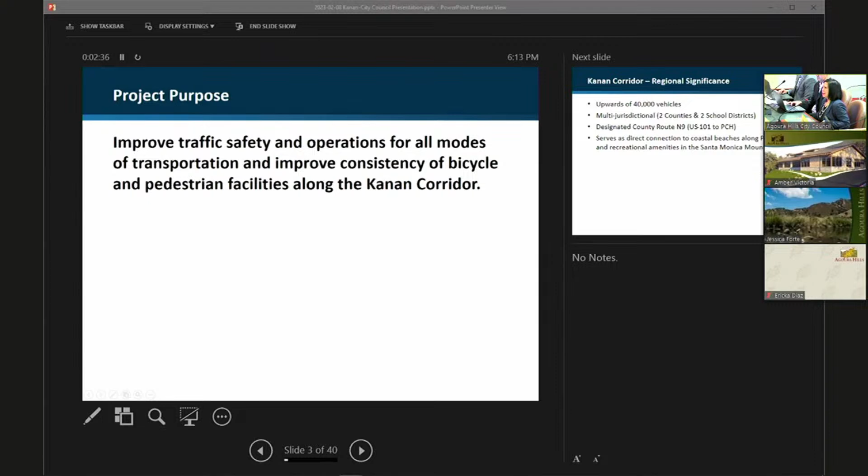Kanan Corridor is one of the most highly traveled roadways in all of Conejo Valley. Daily, the corridor carries upwards to 40,000 vehicles. The Kanan Corridor presents daily safety and operational challenges for motorists from not only the city of Agoura Hills, but both Los Angeles and Ventura counties, and those attending schools in the Las Virgenes and Oak Park school districts. Kanan Road serves as one of the few direct connections to popular destinations in the Santa Monica Mountains, as well as coastal beaches along the PCH.

And, of course, the Kanan Corridor has a direct impact to conveyance of traffic to and from the US 101 freeway. Over the years, the city has administered and completed surveys, studies, and improvement projects along the corridor, all seeking to improve traffic flow. Oops, we lost our... The task to find ways to reduce congestion along the corridor is challenging and very complicated. The city has reiterated their commitment to improving Kanan Road by undertaking the Kanan Corridor Safety, Operations, and Capacity Enhancement Project, and it's been included as part of Metro's Long-Range Transportation Plan and receives Measure R and M funds.

In 2017, the city awarded a professional service agreement to Michael Baker International to complete a project study report for the project. And more recently, in November of 2021, the City Council provided approval for staff and MBI to proceed with Caltrans to begin the project initiation document phase for final approval of the project study report, which is the first phase to a multi-phase project. I would now like to turn the presentation over to Michael Baker International to provide a project status update with Caltrans and presentation of the concept build alternatives for the Kanan Corridor. Joining us tonight, we have Mr. Eric Spangler and Mr. Jerusalem Verano.

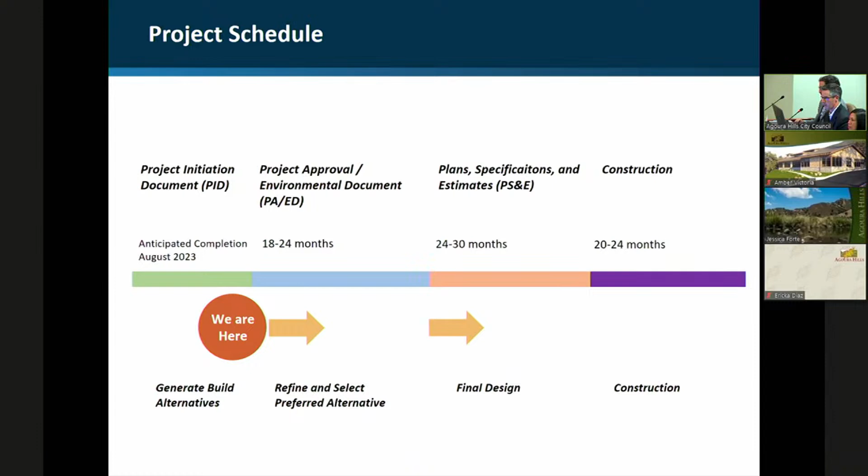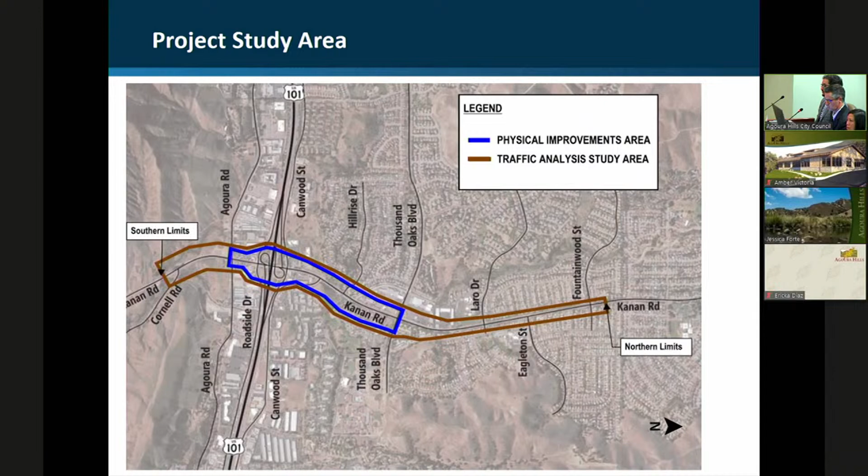Okay, so this is just the interchange Caltrans portion of the project, but I just wanted to give a highlight of the existing traffic challenges and constraints along this portion of the project. So within the Caltrans jurisdiction or adjacent to it, you have 4 closely spaced intersections with high traffic volumes going through the Kanan corridor. Agoura Road, the southbound ramps / roadside, the northbound ramps / Canwood frontage road, and then also the Canwood East Kanan intersection is also a signalized intersection.

Between Agoura and roadside, we have multiple driveways. At both the roadside and Canwood frontage roads, we have a signal operation that assigns an exclusive phase for the frontage roads, so we lose green time as we assign an exclusive phase for those frontage roads, which have much smaller volumes than the other approaches to those intersections. So there's clear inefficiencies in that regard at those 2 signalized intersections.

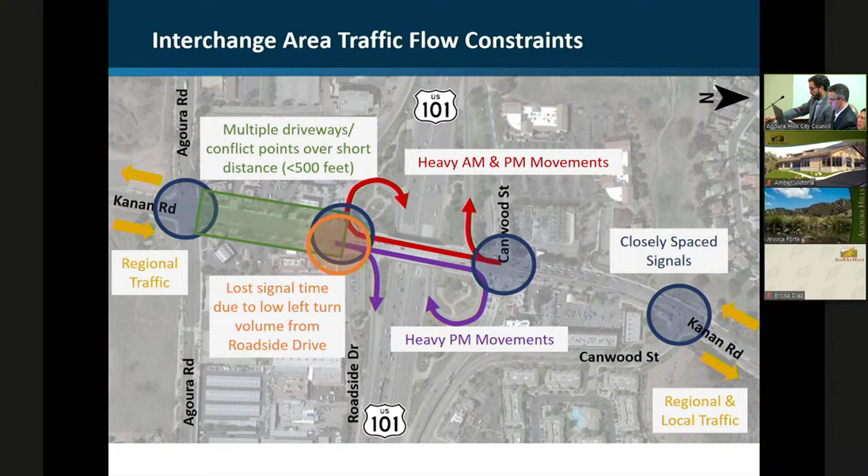And in red, you can see the northbound 101 ramps have heavy AM and PM demand and traffic volumes, and then the ramps coming from the south on Kanan to the freeway using the loop northbound on-ramp and the direct slip southbound on-ramp are heavy in the PM hours. So let's go to the next slide, and I'm going to hand it over to Jerusalem Verano, who's the project engineer, to walk you through the concept alternatives that we've developed so far.

Good evening. As Eric mentioned, my name is Jerusalem Verano, and I am the project engineer. And so we'll jump right into the concepts that we've been developing with the city. We'll start with the no-build alternative, which is alternative 1. The no-build alternative is essentially where we leave the existing facility as is and make no improvements.

So I'd like to just go over some of the existing features of the roadway along Kanan, and just to orient everyone, to the left in blue, we have the planned city improvements at Agoura and Kanan Road. Down the middle of the page is Kanan Road, and down the center is the southbound 101 freeway with all of the on and off ramps. To the right of the page will always be north throughout this presentation. So whenever I say top, I mean west, and whenever I say bottom, I mean east along Kanan. So there's a few inefficiencies along the roadway that we'll get into on the next slide.

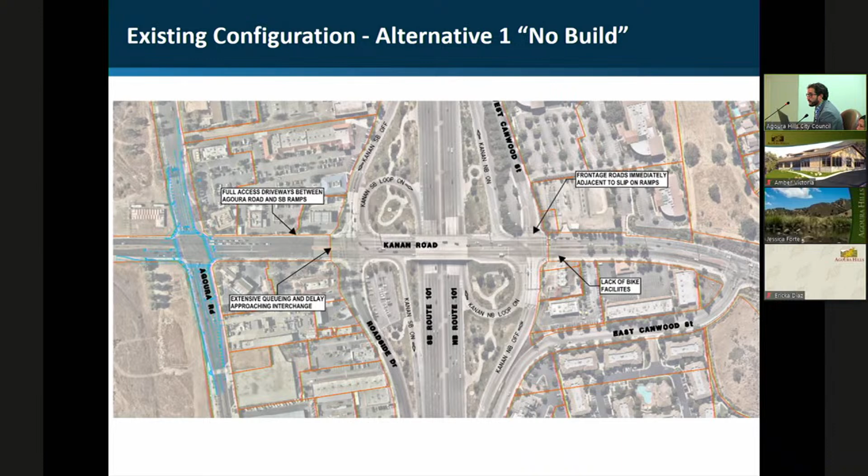So as Eric showed, there are frontage roads adjacent to the existing on and off ramps, and you can just see here that it becomes a confluence point at the southbound and northbound ramps where you have all these different connections coming together and creating some of the congestion that you experience along Kanan Road. So that's one of the challenges that we faced along the route. Next slide, please.

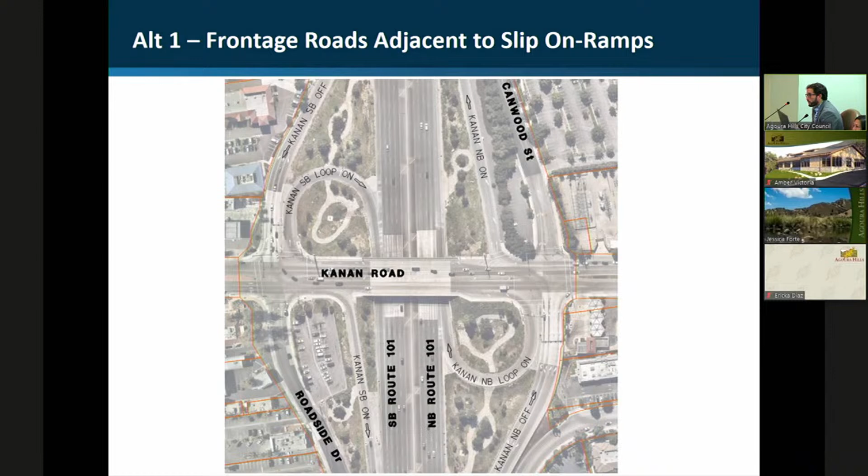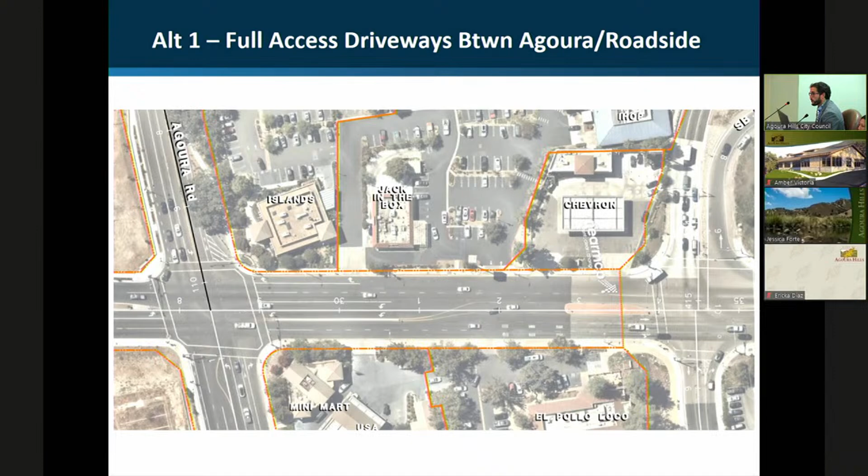And then between Agoura Road and Roadside Drive, the whole area is fully developed. There's many different driveways, access points, and one of the challenges along the route is all of those access points, driveways being able to do right in, right out, make left turns from the center median and coming out of the driveway. So all of those access points create congestion. So that's another existing inefficiency along the route. Next slide, please. And all of that creates heavy congestion throughout the corridor.

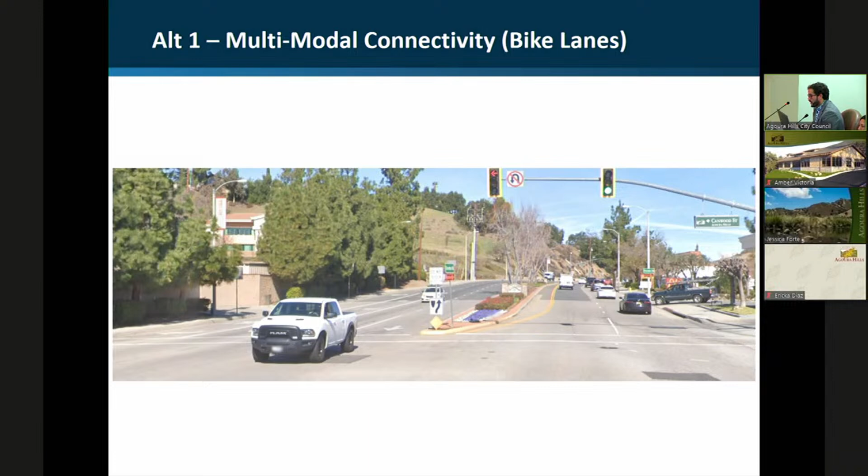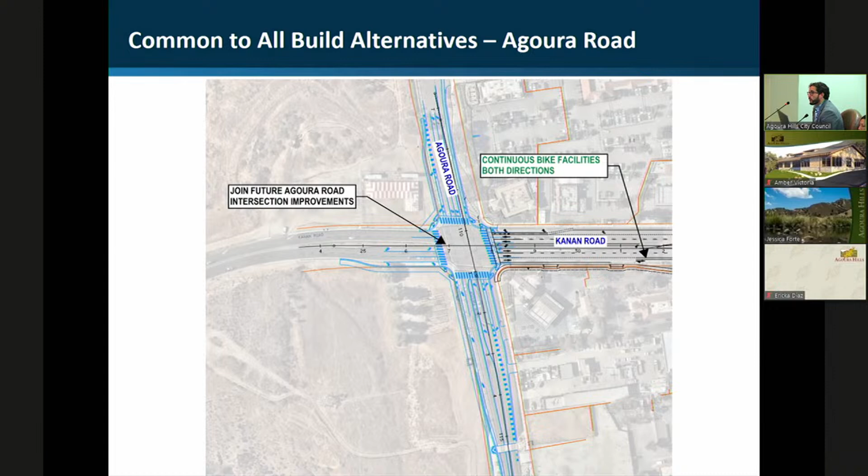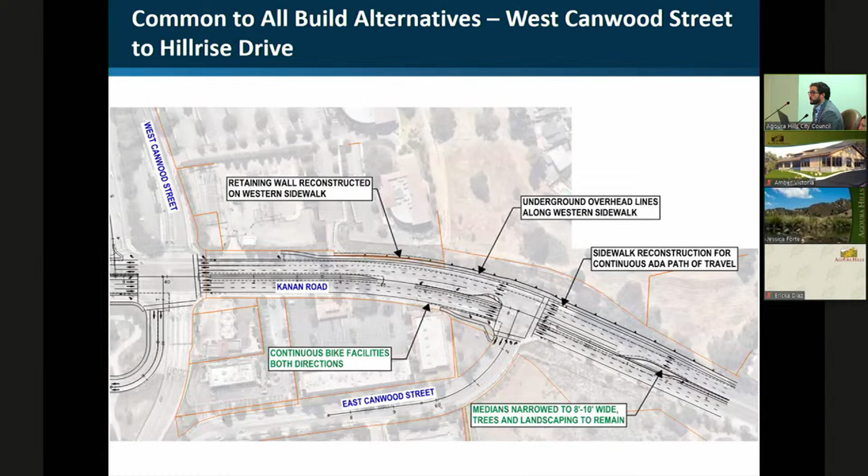Next slide, please. So that's alternative one, which is a no-build alternative, and now we'll jump into the build alternatives, which is the more exciting piece of the project. These are snippets from the geometric approval drawings that we've created for Caltrans. And so we'll really just get into the overview of the improvements. And I'd actually like to maybe skip to the alternative 2 overview page and save these sheets. If we can go to slide 19, please, for later to just come back and reference to. So if you keep going through, the alternatives have common features through each build alternative, which we'll highlight through the alternatives discussion.

All right, perfect. Okay, so alternative 2. This is an overview of the first build alternative. I'll just hit these bullet points real quickly, and then we'll get into some of the more detailed improvements. Alternative 2 will maintain the existing interchange configuration. This means we're not going to move any of the on and off ramps. They're going to stay where they are. We will improve them by widening, but they will stay as is.

This alternative will add one additional lane along northbound and southbound Kanan Road from Agoura Road all the way through Thousand Oaks Boulevard, which is the limit of the physical improvements. And then a continuous Class 2 bike lane will be added in both the northbound and southbound directions. So that's a high-level overview. If we can go to the next slide, please. We'll get into some of the more detailed improvements.

So again, here in blue, we have the city planned improvements at Agoura and Kanan. This is the terminus for all build alternatives. And just to note here on the screen, the purple bubbles represent common build alternative features. So these are common to all of the build alternatives 2, 3, and 4. Anything in green represents a comment that we've addressed, a comment that was provided by City Council at the last meeting, such as adding bike facilities to the route throughout Kanan Road. And then the black bubbles just represent the improvements proposed.

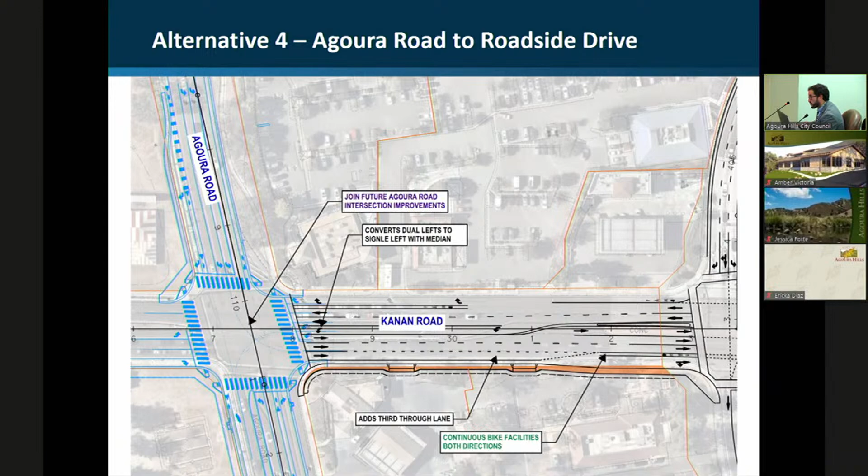We have converted the dual left turn lanes into a single lane, but this alternative does include a median with, you can see in the middle of the page, a bit of a jog for the through lane to shift the lanes up towards the southbound direction to better channelize traffic and provide capacity through this section of roadway. Next slide, please.

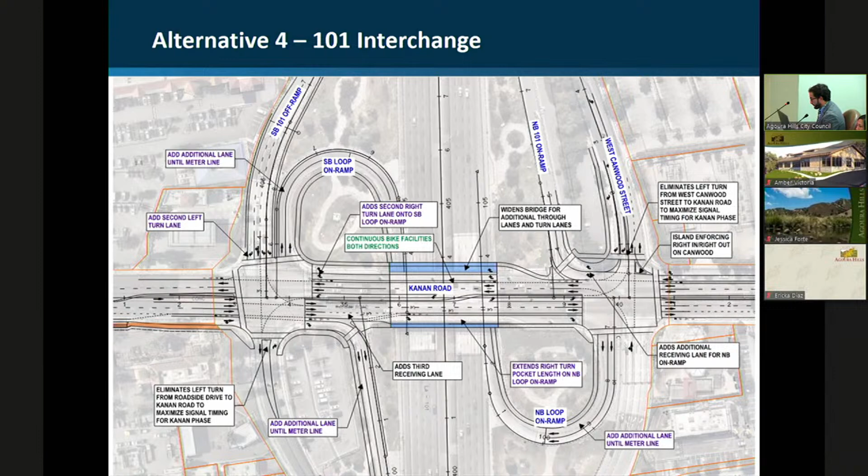Similar improvements here to alternatives 2 and 3, adding that through lane up to East Canwood Street, dedicated right turn lane at East Canwood Street, construction of a retaining wall, undergrounding power poles, and the right turn lane reconfiguration at West Canwood Street, as well as what I mentioned earlier about the left turn lane elimination at West Canwood. After this segment, just north of here, East Canwood Street, that's where things get a little different with this alternative. If we could go to the next slide.

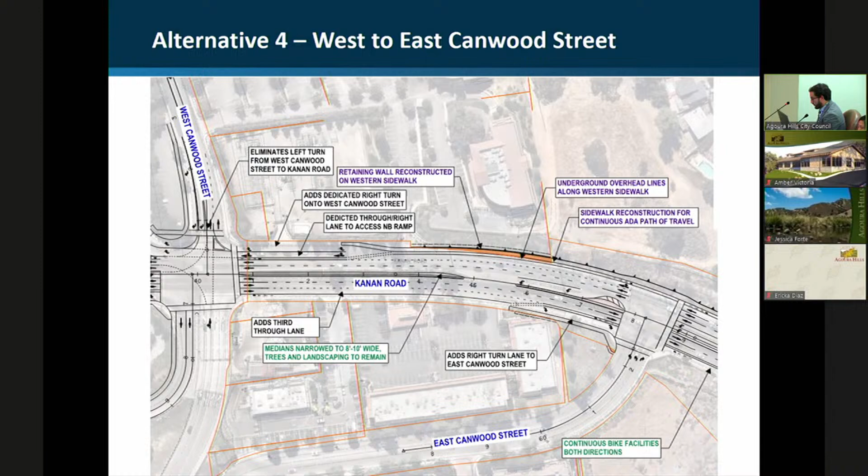So rather than widening Kanan Road through this segment with an additional lane, we've maintained 2 lanes of traffic, north and south along Kanan between Hillrise and Thousand Oaks. And we've utilized that space for a buffered bike lane. So that, again, that's a 3-foot buffer separation with a 7-foot bike lane in both the north and southbound direction.

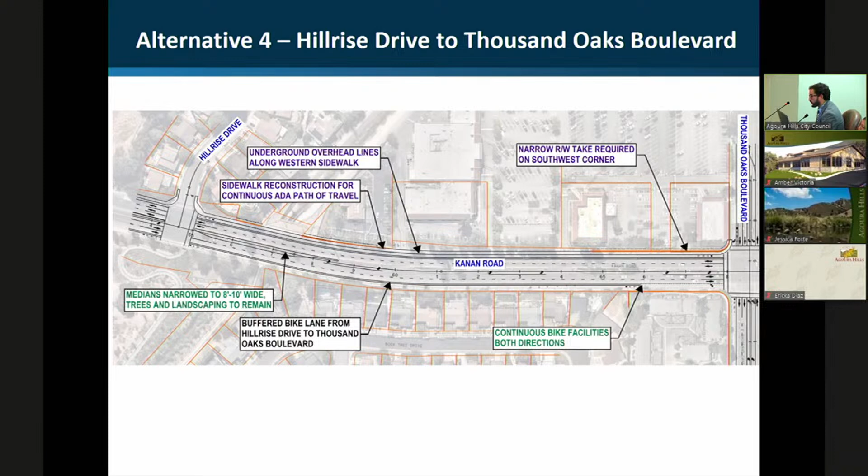This does require reconstructing the existing sidewalk along the southbound direction, as well as includes that feature of undergrounding the existing power poles and requiring a sliver right-of-way take in that southwest corner of Thousand Oaks Boulevard. Next slide.

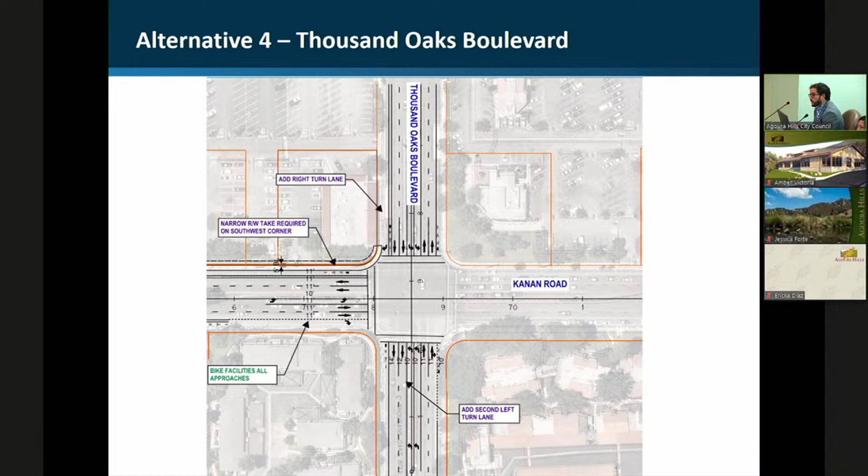And here at the intersection of Thousand Oaks Boulevard and Kanan, we have very similar improvements to alternative 3. Pretty much a similar configuration along Thousand Oaks, but again, we're transitioning that buffer separated bikeway along Kanan Road in the northbound direction and starting in the southbound direction. So that's the one unique change here. Otherwise, the improvements are very similar to alternatives 2 and 3. So that concludes the overview of the concepts, and I'll just pass it over to Charmaine.

Thank you, Jerusalem. So what are the next steps for the project? There is no immediate action required tonight. However, this item was really just for an update to City Council on the status of the project with Caltrans, and we do welcome any feedback or questions tonight. The project is proceeding steadily through Caltrans to finish the PID phase by the end of summer, beginning of fall.

The completion of the PID phase will result in a final approval of the project study report, project development support document, and it programs the project with Caltrans that identifies the cost and schedule of viable build alternatives that meet the purpose and need of this project. The city has requested already to execute a co-op agreement with Caltrans for the next phase, the project approval, which is called the Project Approval Environmental Document, or in other words, the PAED phase. We anticipate the co-op would be brought to City Council this summer for approval.

Once in the PAED phase, robust comparisons of alternatives will be performed. More technical analysis is performed on each alternative, as well as presentation of these build alternatives to the public and stakeholders for their input. It is during this next phase that we can continue to refine the concept alternatives presented today and ultimately to select the preferred build alternative that we would construct for Kanan Corridor. Next slide. And with that, this concludes our presentation. Staff respectfully invites the City Council to provide feedback and to answer any questions.